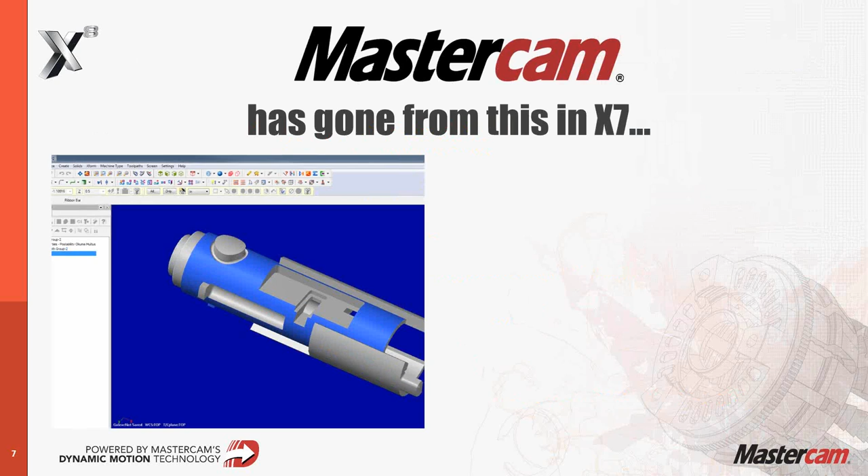If you've already installed X8, you might notice how the graphics have changed. We basically rewrote the graphics engine from the ground up, how the shading works, solid selection, and how the geometry is displayed on the screen, so it can really take advantage of newer processors, more RAM, and a good graphics card.

So what I'm going to cover here is just some of the general system improvements, from how the software looks to migrating from X7 to X8 and things like that.

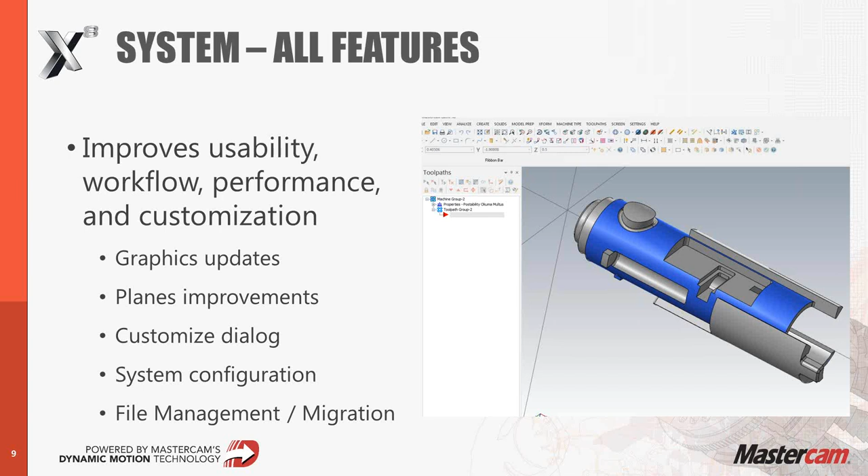This slide is more of what I've already been talking about, but we've worked on the graphics. The customize dialog box has changed, how you can set up the different toolbars and really make the system custom tailored to you, and also how you're migrating the software from 7 to 8. We got a lot of complaints before, and as a dealer we're always relaying your gripes to corporate on how we can make your lives easier, improving your experience moving from version to version and making that as easy as possible.

So some of the things from the general system: you might notice the View Manager is now called the Plane Manager, because this is handling all the different planes that you can select in the software. I also have a note here about hotfix 2.

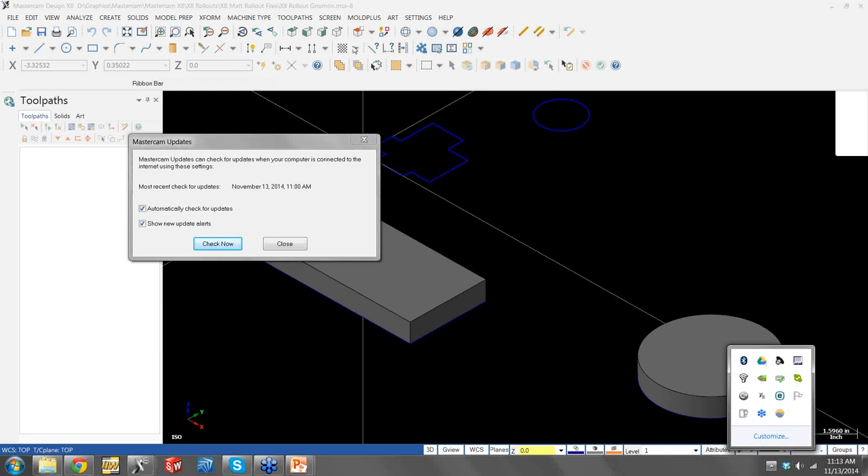If you already have X8 installed, if I hop over to one of my X8 programs here, under the Help menu there's going to be an Update Mastercam utility. If you have it set to automatically update, you should get a notification in your bottom right bar that there's a new Mastercam version available, but you can always go here and check manually.

Since we redid the planes and how they work in X8, there were a couple things they had to improve, so an update came out at the beginning of the week to address some of those items. With hotfix 2, when X8 first came out you weren't able to edit the default planes, but you can edit those now as you please.

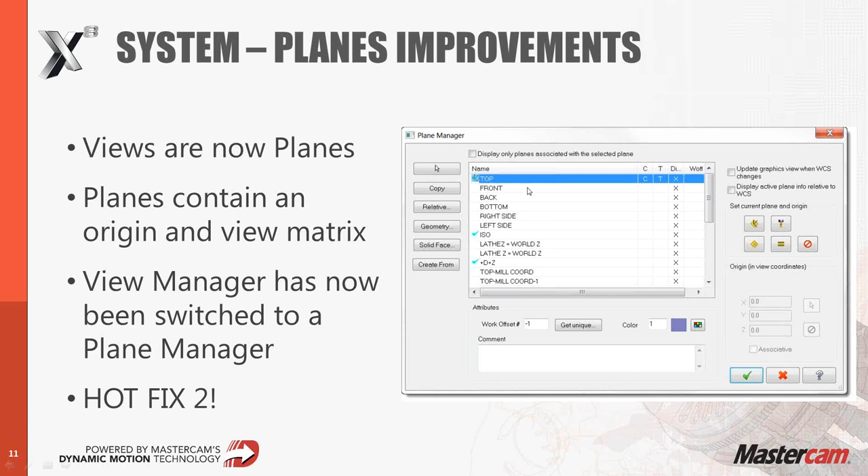As I was talking about the new workspace files, now that we're in this new format, it's going to be able to go from version to version, but it basically contains all those separate files that were in X7. Before you had a toolbar file, a key mapping file - all of those are now combined into the same interface. And what a lot of people don't know is you can also bring your key mapping file over once you get your new toolbars set up.

So some of the first things we do here: if you right-click anywhere in the open area and go to the Customize menu, you have your toolbar customization. The context menu is how you set up what your right-click menu looks like. Then if you go over to the key mapping file here, you can say import and bring over your key mapping from X7 or any other previous version, if you're still a big hotkeys user.

Another thing on this tab that a lot of people don't notice is how we set the large icons has now been moved to this menu. That's one of the first things I did when I installed X8 - I could not see those new icons at all, so I just switched it to large icons.

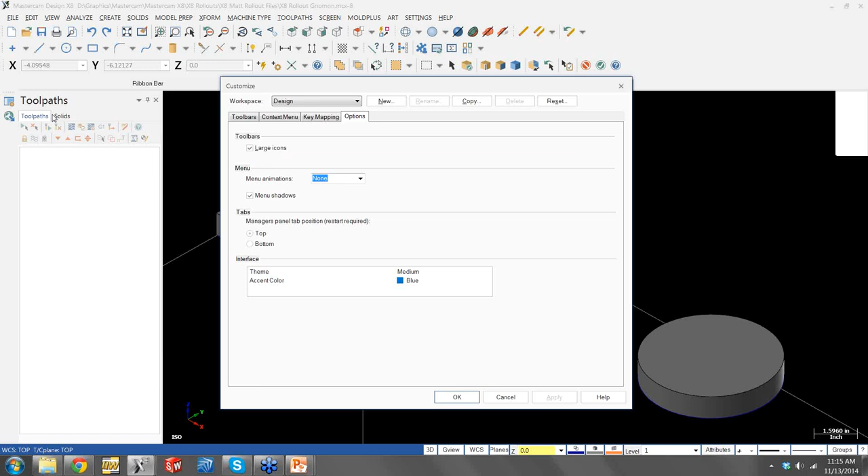Another thing a lot of people notice is on the left-hand side I have my toolpaths and solids up at the top. When you first install X8, these menus are going to appear at the bottom. I'm a creature of habit, I want it to be how it was for me in X7. So you just switch this from bottom to top, restart Mastercam, and now all these menus appear where you're used to seeing them in your operations manager.

Do we have any questions yet, Dave, or anything?

So a little bit about file migration. There's now two different modes for moving from older versions to X8. What I always say is if you're going right from 7 to 8 and you're using the normal file locations, you just want to use the basic migration. It has everything pre-set up - it's just a couple clicks and you can get everything transferred over right from 7 to 8.

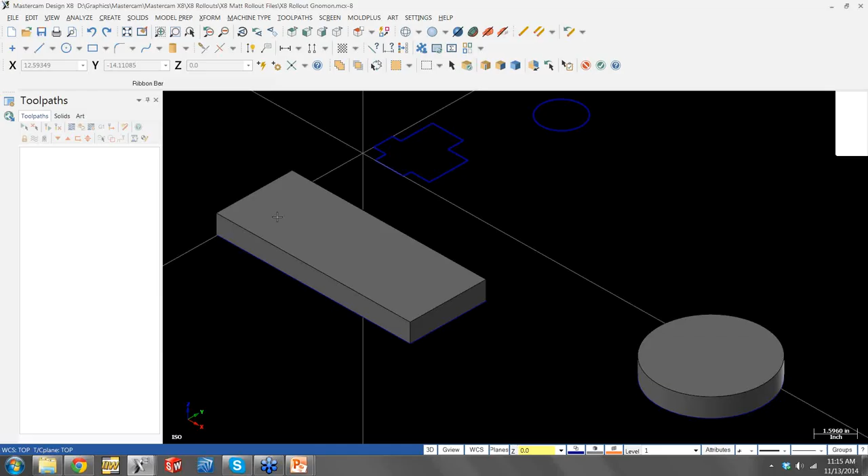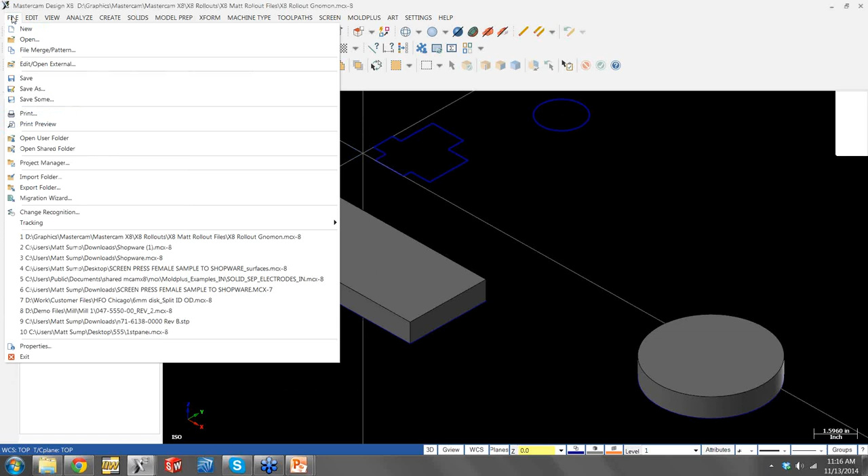If you're going from an older version, you're going to want to use the advanced utility of the migration. If you go to the migration wizard, you'll have the basic, which just strictly migrates your shared and MCAMX folders into the new X8 locations. If you do have custom locations, you can define them here, but if you're using custom ones, I always say use the advanced utility because you can really get into the nitty-gritty of how files are being transferred over and what's being moved over.

You have your options of different file types and what version you're coming from. So if you're coming from 6 or older, you can just say I want to move files from that version, but you also have the ability to move multiple versions worth of files over in one setup. This Finish tab here basically gives you a summary of everything you have set up. Before you click go, you want to make sure you have all your ducks in a row and haven't missed a set of files or something like that.

Some of the improvements we've made on the design side of the software, and also a lot in the solid modeling tools, is we've updated how the GNOMON works in Mastercam. If you guys were like me, the X7 GNOMON had the XYZ listed on here, and you didn't really know where to click to move different features around or edit how the geometry was being displayed.

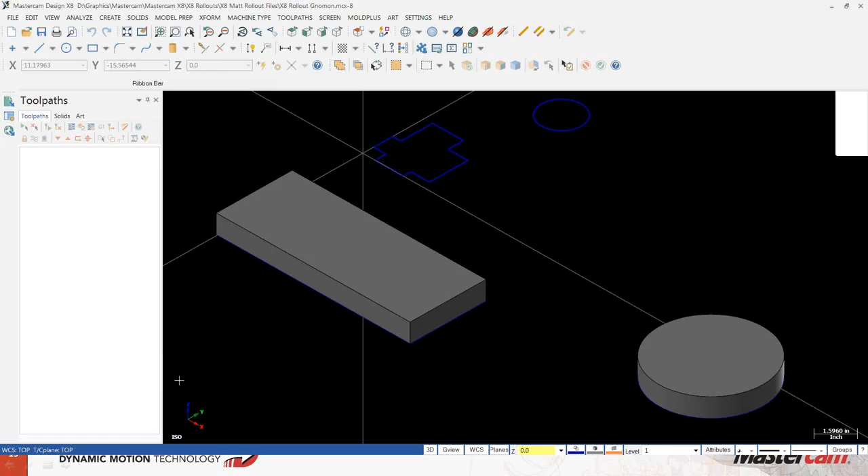So if I go back to my Mastercam here, I got this chain, and I want to move it or rotate it - I just go to Xform Dynamic, and I pick what I want to move, say OK. Now this is the new GNOMON here, so I can really place this wherever I want because it's relative to the geometry I have selected. Let's say I just plop it right in the middle here.

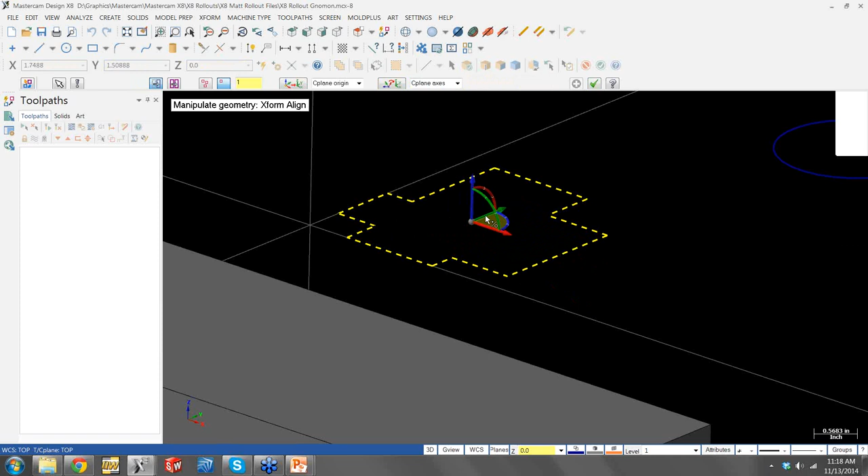Now all these sliders are dynamic based off of the axes that you're trying to move, and it's always going to give you a preview of the area you're selecting. So if I'm clicking on this part, it's going to rotate about. If I'm clicking down here, it's just going to move it in the X axis.

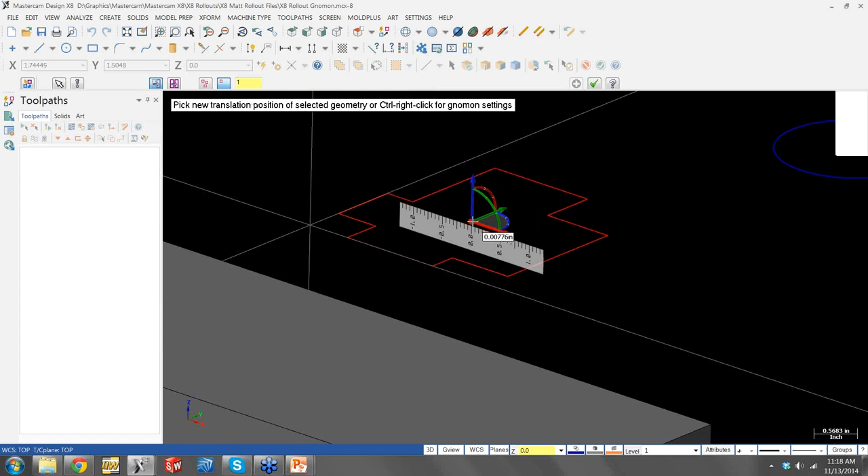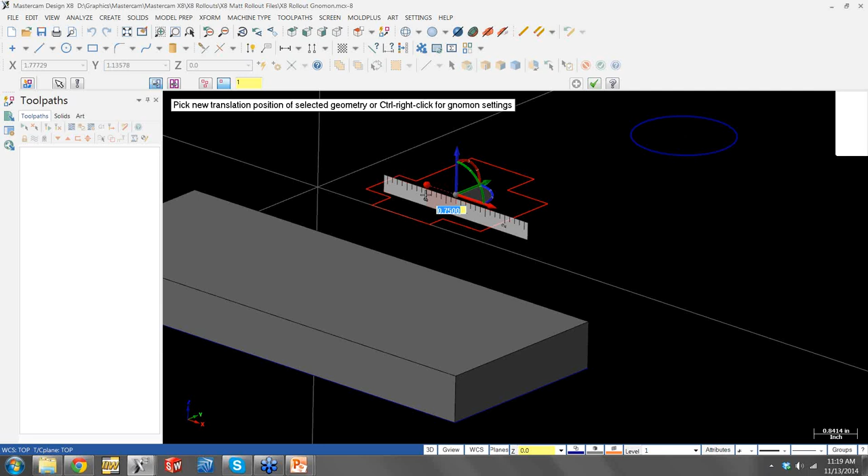So if I want to move it a half inch, I can just say 0.5, and if I hit enter once, that's going to give me a preview of what I was typing in. So let's say I didn't want 0.5, I wanted 0.75. I can hit enter again, and then it doesn't accept my selection until I hit enter a second time.

And now that geometry's moved. There's also, it's kind of hard to see here, but if I go back into the dynamic Xform before I go into a specific function like moving the geometry, you have the option to switch between geometry editing and actually editing your axes.

So if I want to rotate this around, it's now in axes mode. So it's not moving the geometry, I'm just moving where my plane is. So it makes it an easy way to set your planes from before.

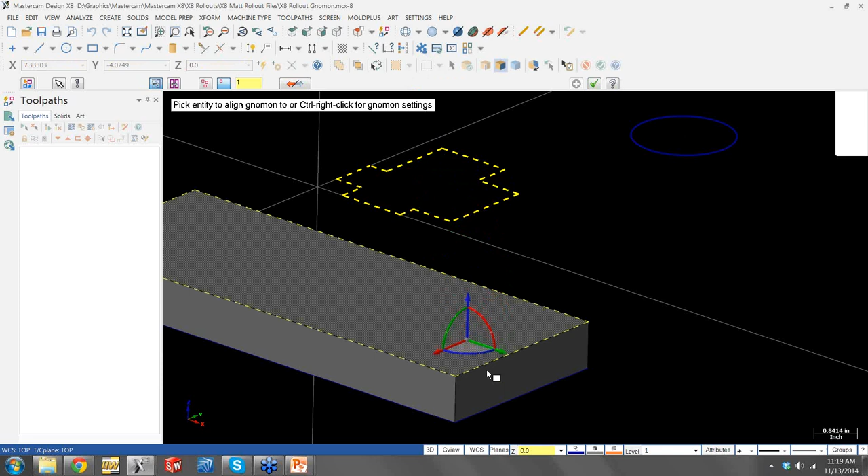So if I want to move this around, I can pick this and it'll snap to different faces of what my Z0 is. See how that blue arrow sticks up based on whatever face I'm on? It just makes it an easy way to set planes on different sides of the part, and then you can select the center ball here to then assign your 0 point.

And then I can update here, do I want that to be my C plane or just my T plane, and so forth.

So any of you guys with the solid modeling option may have noticed if you're already using X8, the menus look quite different. This is going to be kind of the direction we're going for all the menus in the software. Everything's going to be contained in a basic and advanced setup. They did a lot of usability testing.

Mastercam, as part of this push to the new interface and menus, hired what they call a user interface engineer, and they did a lot of testing over at corporate with the beta testers. If any of you guys are on the beta program, they had the ability to log how many mouse clicks you're using in a session, what the total distance your mouse was moving in a session, and features that guys weren't typically using. They would kind of get them out of the way and move them to that advanced tab, so you're not getting a menu that's cluttered with a lot of things you don't typically click on.

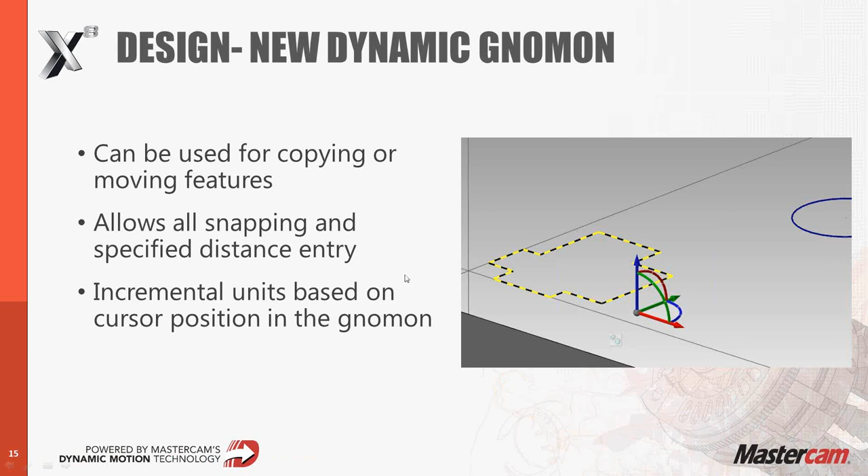So we've added a lot of things in the solids as far as actually editing them and creating the solids. You can create multiple solids within the same operation. There's now solid edge awareness anywhere in the solid. So before you'd have to create curves on all edges in order for it to know what the midpoint of this line in the solid was.

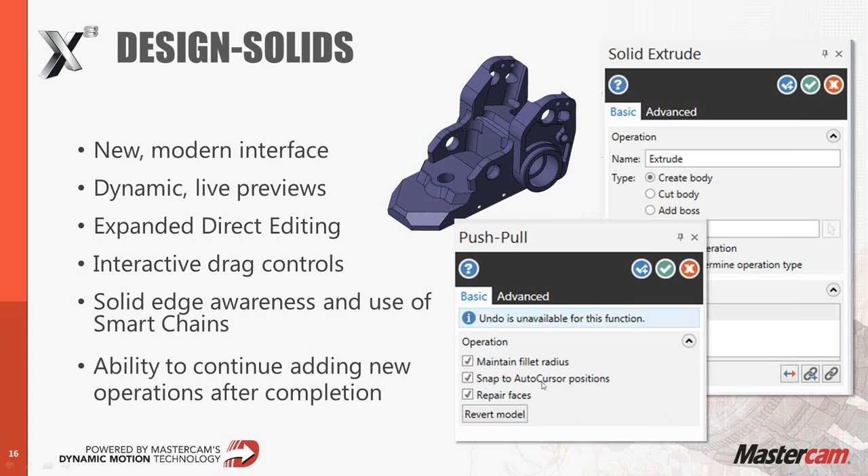Whereas now it just knows based on that edge of the solid what those features are that a user might want to click on. And you'll see in the option here, it's that snap to AutoCursor position, as far as intersections and midpoints and things like that are concerned.

So as far as actually creating the solids, you have the same options as before. They just simplified, as I was talking about a few minutes ago, allowing you to create multiple solids at the same time. So before, if I wanted to extrude both of these solids, you'd have to go out, create a new solid, go back in, perform the same function again. Whereas now if you just go to solid extrude, I just pick the chains I want to extrude, and I can pick as many as I want, and then move them up by a specified distance.

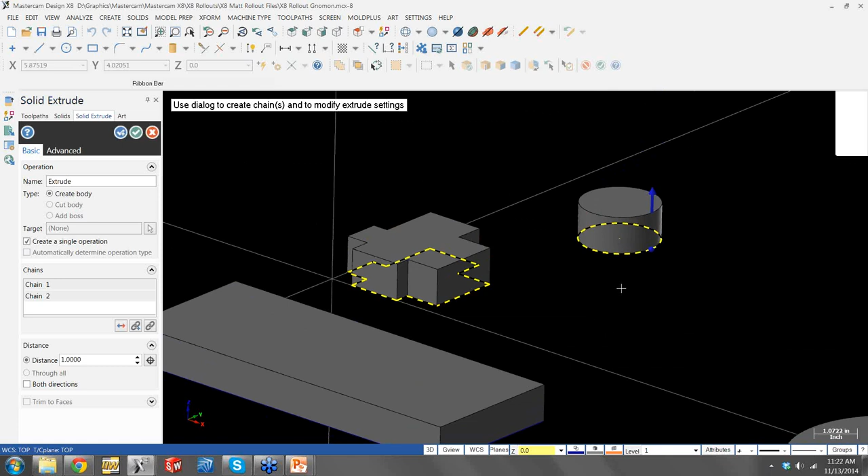So if I get these centered on the screen, just like the dynamic gnomon, all of these other features are dynamic now as well. So you have the slider bar to set it, and you can always type in a value and go from there.

So one of the cool features I noticed they added in here is called split solid face. You can basically, without having to draw additional geometry or go off a print or something like that, edit the solid dynamically without having to set up your different planes. It just knows based on the face you want to select and how you want to edit and split the solid up.

So the one I have in here, let me see, I got too many files open. Is this one it?

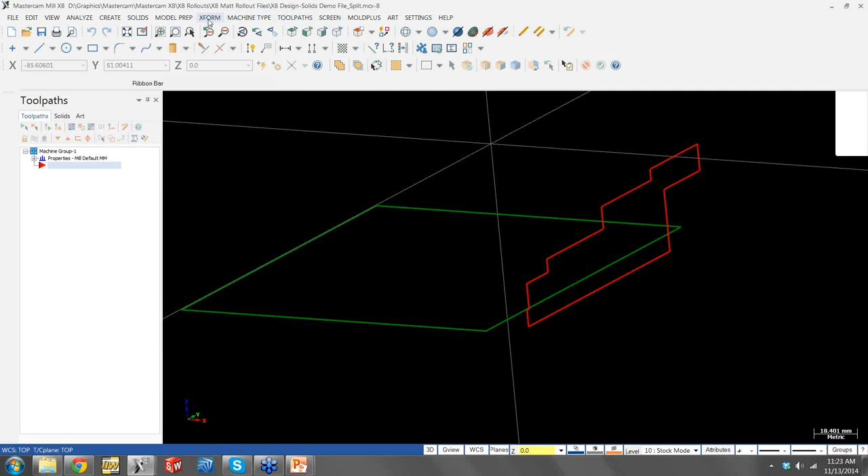So let's say I have a print from a customer and I need to create a solid block, and I can use this geometry on the right in order to split it. So I can go into my solids commands here and say extrude, just like before. We can enter this up, pick it. Let's say I want to just make it 50 - this is in metric, so it's 50 millimeters.

Now that I have my solid created, if I want to split this face or create anything like that, I can go to my model prep tool here and say split solid face, and I'm still in my top plane. So if I go to my top view here, it's still set to the top. I don't have to assign this plane on the right.

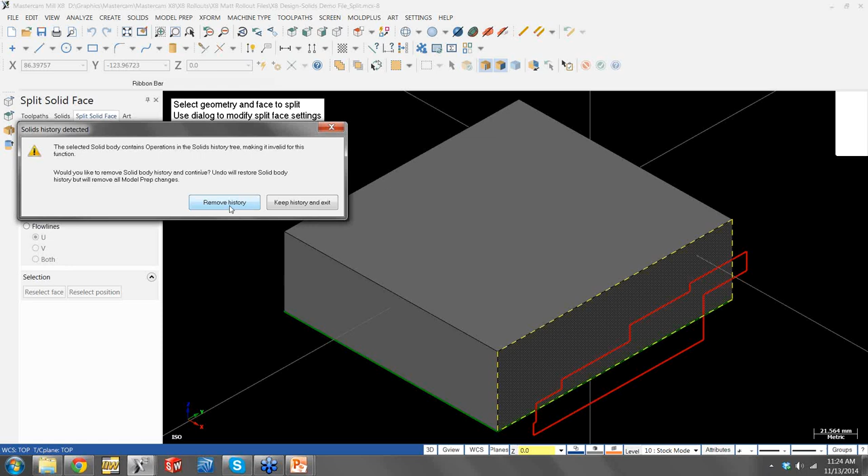But what I can do is just say, okay, which is the face I want to split? Now anytime I'm doing any of these direct solid modeling commands, it doesn't necessarily care what the history is, so it's going to pop up and ask me, do you want to remove the solid history, because I'm directly editing off the solid model. Then I just pick the chain where I want to use to split the face, and you can see it gives you a preview here of how it's going to split that solid.

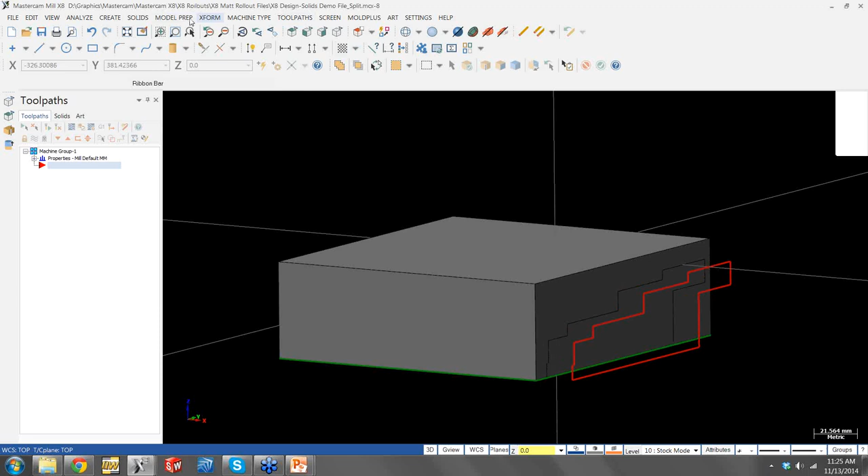So I can say okay, and now these solid bodies are split, and that was the geometry based off of my print. I can just use the model prep commands and say I want to get rid of this face, and it basically splits that solid to how it was based off of the print. Before, you'd have to do an extrude cut, go into another command, and you can really do anything you want based off of that.

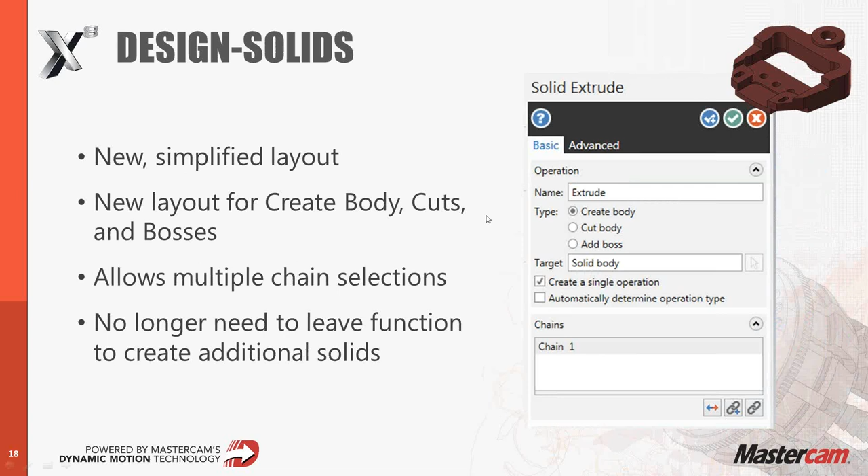So part of what I was talking about before with the solid edge awareness, it just allows you to select on the model without having to create wireframe, and you can make positioning a lot easier.

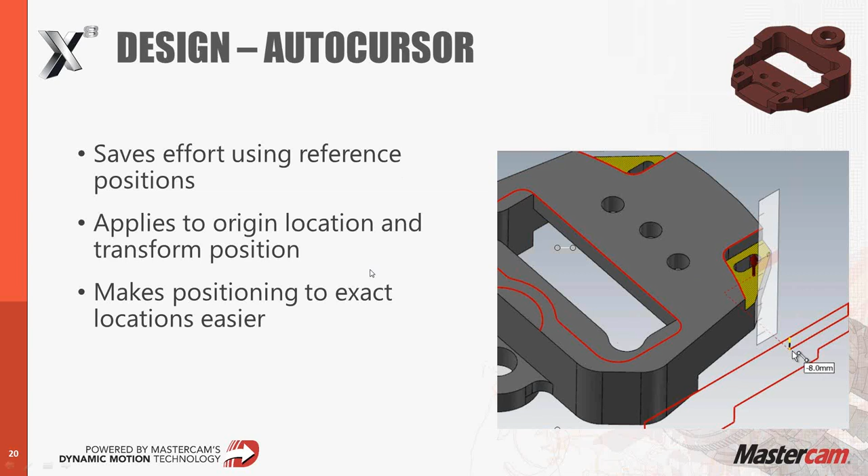So if I go back to that part I was just in, let's say I want to move this face back to a certain position - now I want to turn on my snap to auto cursor position. If I want to drag this back and I don't know what that specific distance is, and I just want to pick it up off the print, I can just select here off of that geometry saying, okay, it moved it back 42 millimeters or whatever it was.

You can also now use that dynamic gnomon I was talking about as far as moving geometry or using those solid features as a way to edit really anything on the solid. So basically this allows you to use a reference pointer off the existing model in order to edit the features however you please, without needing to know a specific angle or having to read off the print. You can just know, if I want to rotate this hole 15 degrees, I can reference it off that point, use the dynamic gnomon, and just rotate that feature 15 degrees without having to really get into it and edit the feature directly.

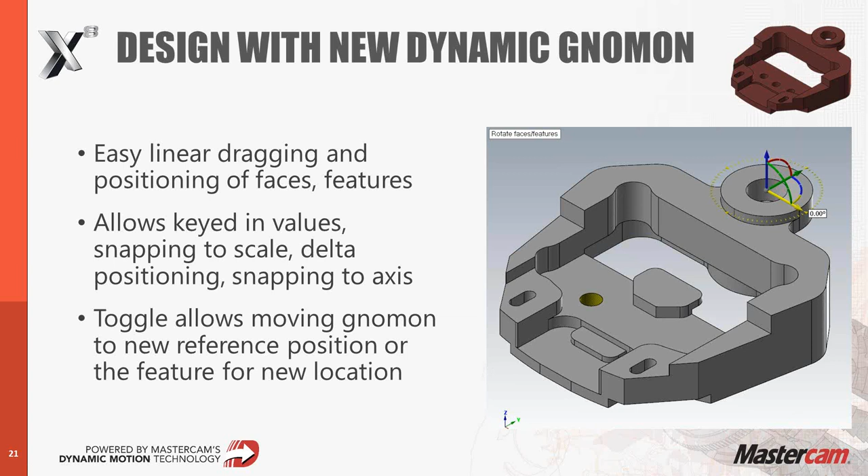So a little bit on that solid edge awareness, I'll show you guys some here in that file. It kind of takes care of a lot of different functions that you would have to use before as far as editing the solid is concerned.

I'm just going to do this real quick here because I know you guys want to see the toolpath part.

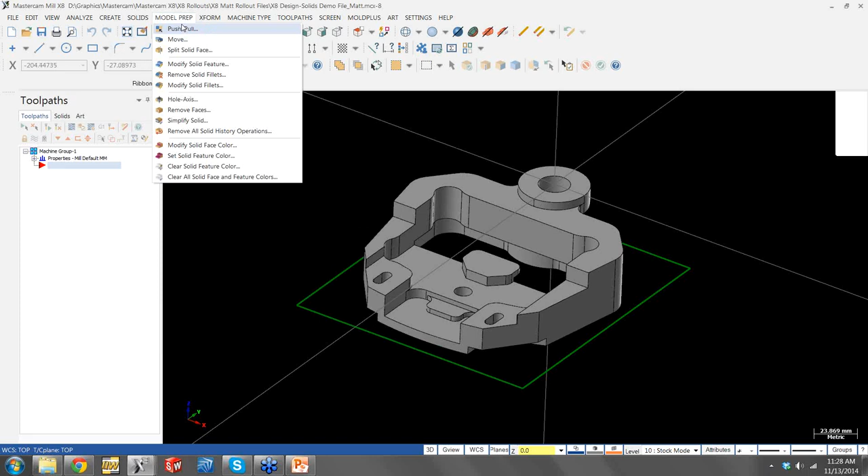So say I just have a basic solid here and I want to move this face up to that other face - before you'd have to create a wireframe or know what that extrusion distance would be. So you can just go to the push-pull here, say I want to snap to auto cursor positions, pick that face, and now I can just snap it to that edge, and it knows without having to merge it. It doesn't create separate bodies - it knows that since it's on the same plane as that part of the solid, it's now the same solid face.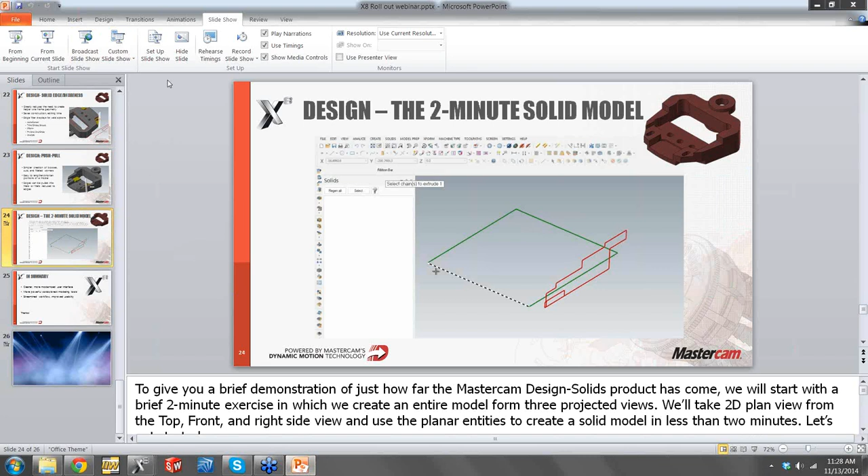Very powerful tools. So while Dave's getting set up here, I am just going to let this video play.

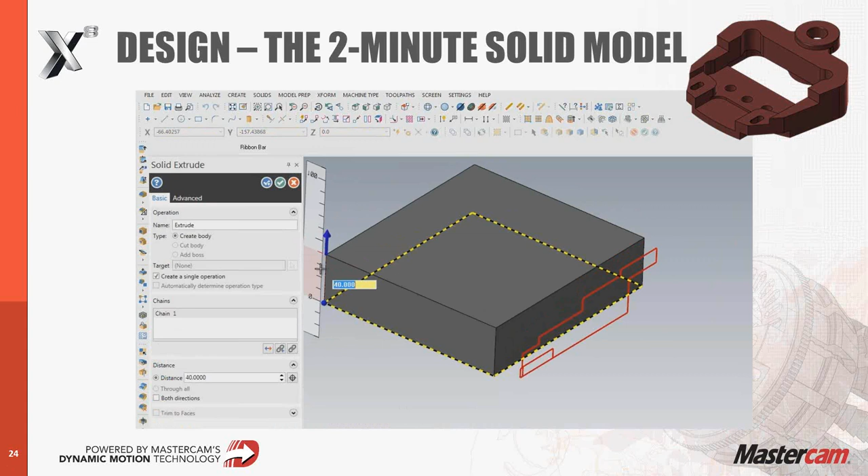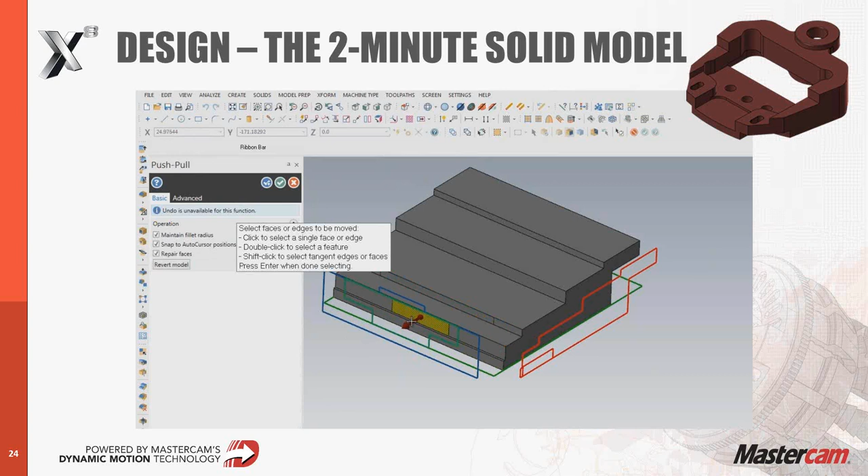This is actually creating that solid. You saw some of the features I was working off of, but it's what Mastercam calls a 2-minute solid model. I don't know how long this would take to make in previous versions, but it's just a combination of all those different features I talked about: splitting solid faces, using the direct solid modeling tools that are now in there to really create solids quickly and easily. These are really handy tools as well, if you're getting models from customers or from engineering where you need to make quick changes on the fly to the model in order to really get the part ready for machining, which is what our designing has always been about.

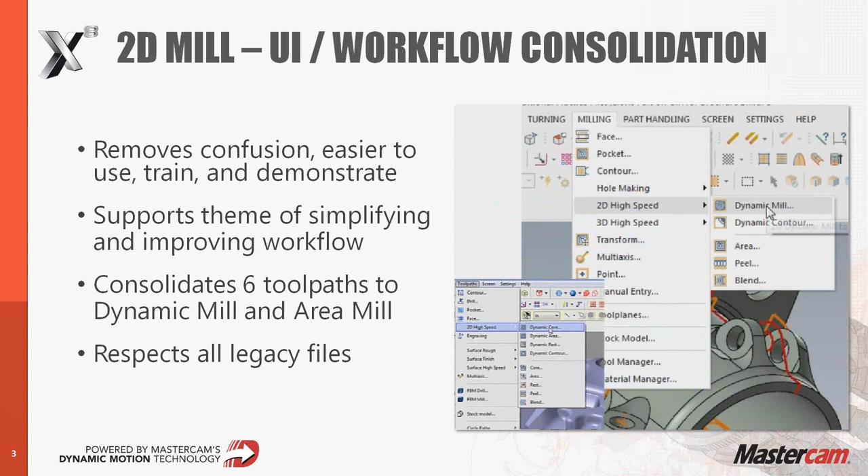Now I know everybody's going to probably ask this question: what happens to all my old files? All your old files are updatable, so once you bring them into X8, it's going to automatically convert those toolpaths to the new style, with just dynamic mill or just area mill. So you're not going to lose any of your options and you won't have to recreate anything.

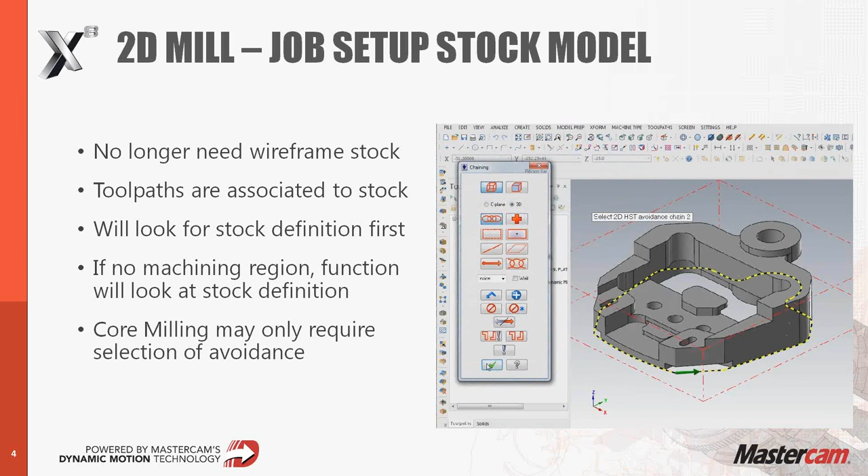So with combining everything, some extra features that have been added are the new style chaining. I know you're probably thinking, what could you guys do different? It was working great to begin with. Well, inside here now, you've been used to just machining regions and avoidance regions. Now we've added 2 extra categories: air regions and containment boundaries. We've also enhanced the machining regions to now utilize the stock setup page. So if you're setting up your stock ahead of time, when doing a dynamic core, instead of having to draw a box or a cylinder to represent your stock, it can now pull the outer boundary of your stock setup page and utilize that as the machining region, saving a couple extra clicks and some extra geometry from being created.

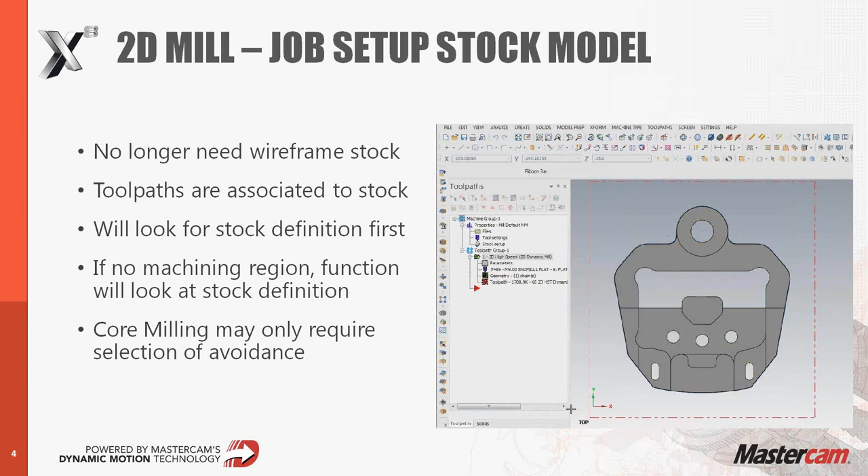The new chaining - here's the new menu, if you guys can keep seeing my screen here. It's all consolidated, so when you go into dynamic area or dynamic mill, it comes up with this, and you can just easily choose: I want to machine from the inside or from the outside. That toggles it between doing area or core. Once you get further inside the toolpaths, that's where you can even turn on the rest roughing in both area and core mode. So once again, it's saving a couple extra clicks and having to change over to different toolpaths.

Like I said, we also added 2 extra style chains that you can use to customize this toolpath even more. The first one is the containment regions - just like in the 3D world, it's going to contain the toolpath within that zone only. It's going to do exactly what it says: it's going to contain the tool. And then you get air regions, which are going to utilize whatever chain you select.

It's going to basically treat it as an empty void that it doesn't need to machine. It could go and plunge in there and cross through, but it doesn't need to go and machine that.

So I'm going to toggle over to a part over here. A little bit of a complex part, lot of different features going on this one. I'm going to show you a couple different toolpaths. The first one, just like what you guys are used to, is a dynamic core, starting from the outside, working its way in, machining out all the different zones.

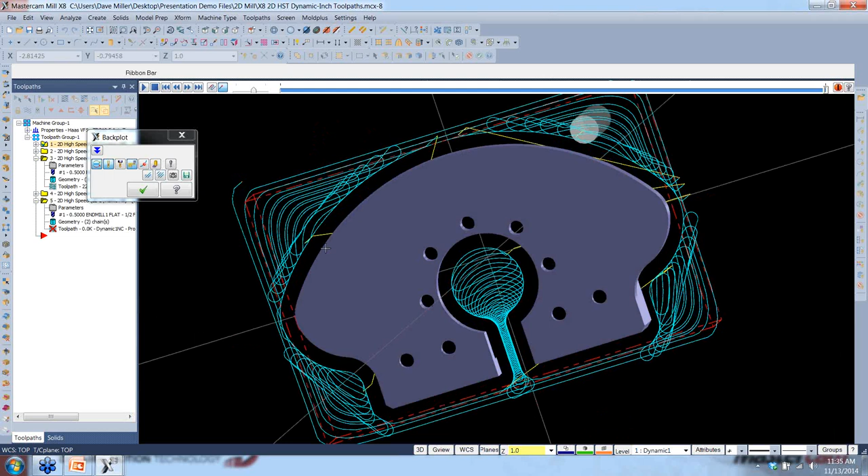Now, all we actually selected on this was an avoidance region being the outer profile of my part. We didn't select any machining region or anything. It automatically takes the max extents for my stock, which makes it a little bit quicker.

Dynamic area mill, just doing a cavity, so we selected the machining region being this face on the floor, and said start from the inside, pocket that out. Quick and easy.

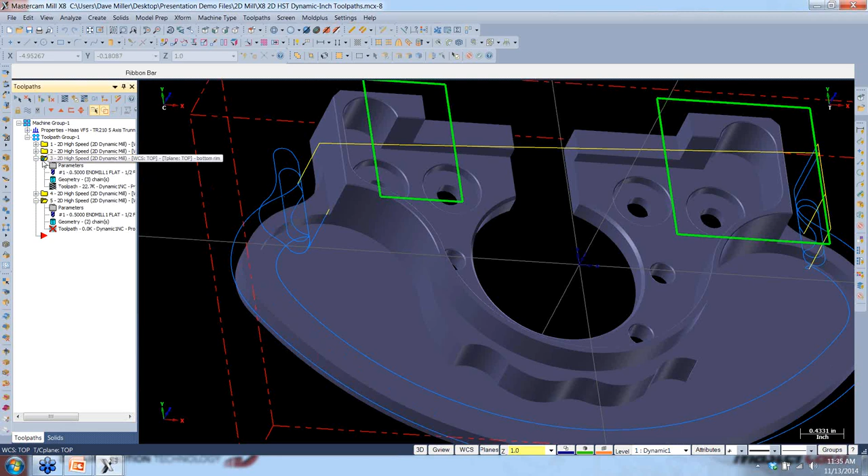For extra customization, in this example what we're doing is selecting the machining region being this face, and then telling it to avoid these boxes so it doesn't wrap around the edge or onto anywhere on the inside here. That's going to clean up just in case there was an extra lip left from roughing. So you can customize it pretty easily.

You can do the same thing with this face. We drew a circular type of feature that would represent this top lip and said, machine this lip, this top face. It's getting machined from the outside, working its way in, just cleaning up what material was left.

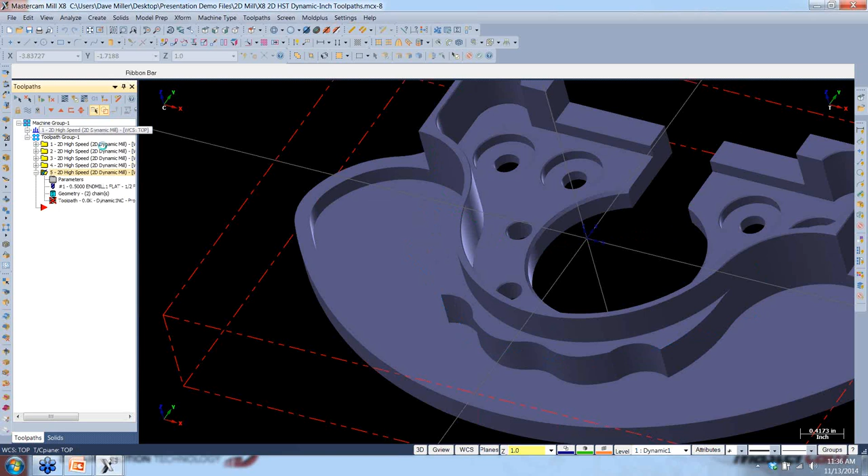And this last one, where we actually said, okay, this face is my machining region, but then I can select this slot that's already been cut out from my dynamic core mill and say that is an air region. Now, in prior versions, you could select that as an avoidance region, and it wouldn't cut in there.

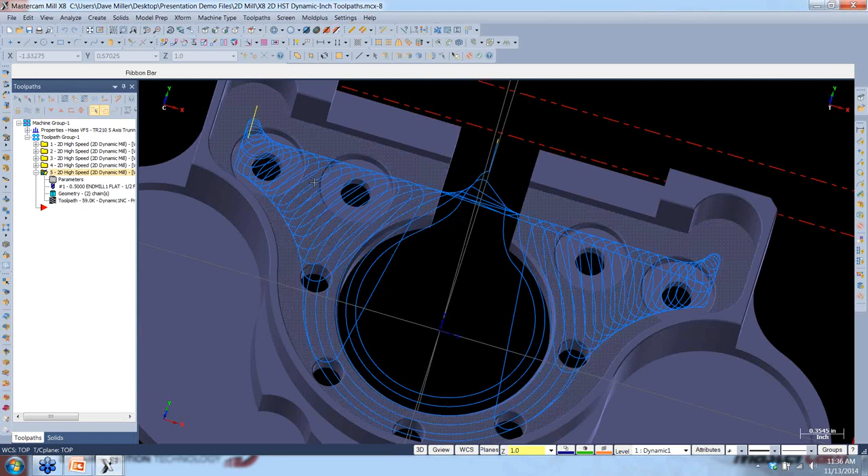But it also wouldn't start inside of here, so it would have to helix down into an area where there was material, which is a little harder on the tool and wastes extra time, versus now it's going to plunge inside that air region and do a nice smooth entry onto the part.

It can be quicker, easier, and pretty simple to chain. It's just two chains, once again, machining region being the face, and an air region being this loop. Quick and easy, and it's going to save quite a bit of machining time as well.

Another thing that we've added to the 2D high-speed toolpaths is our first pass offset. This is in all of your dynamic mill toolpaths. What this can really be utilized for is, let's just say my stock is irregular.

Maybe I'm setting this up as a 2x2 inch square for stock, but maybe I had Ryan go saw cut this, and he wasn't that accurate with it, so I'm not sure exactly what that extra material is.

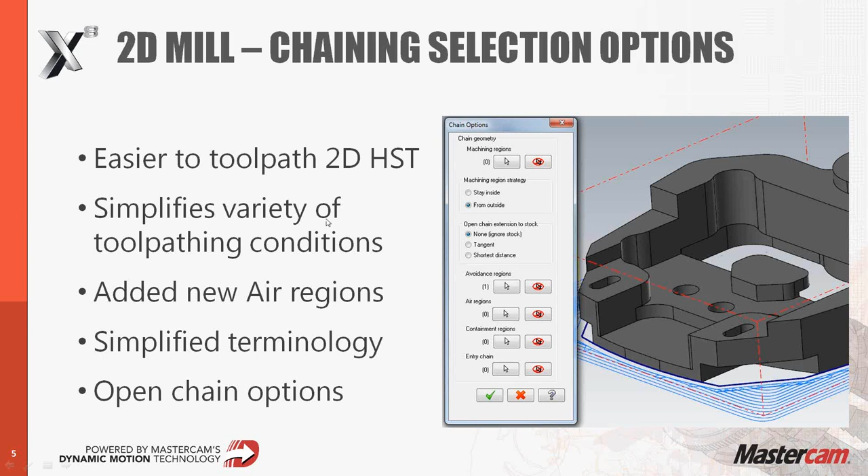So what I can do is offset the first pass maybe 1/8 of an inch or so, and I can even reduce the feed rate on that first pass. That allows it to slowly go through that first loop, and once it gets through that first pass, it's going to speed up the feed rate to the proper feed rate to cut when it's a known size material. Just trying to be a little bit safer here, and accommodate for irregularities on the stock size and shape.

It's a nice handy feature to utilize in there. Just skip through that video there, and do a video of this being machined.

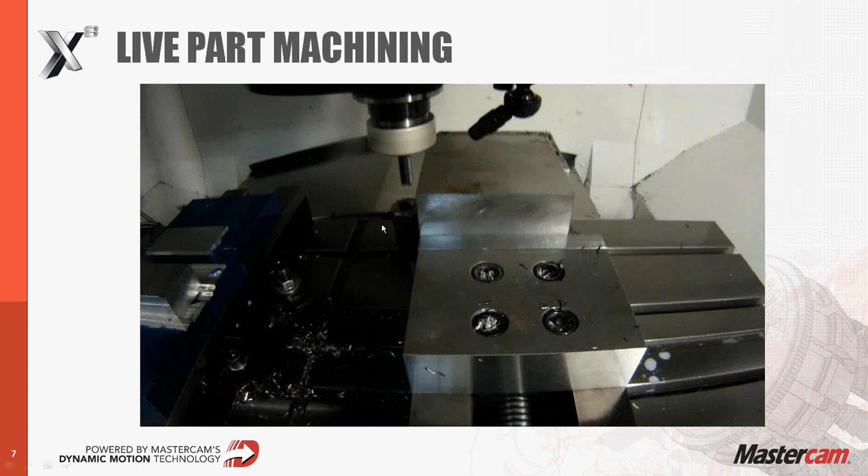So if I actually let that run through, this was, I believe, run at the local Okuma dealer over here. This was a 4130 steel that we cut. You can see it working from the outside, working its way inward, shaving away that material, with a nice even load on that tool at all times.

Not sure if you guys can actually hear it, but one of the nice things about these toolpaths is, for anybody that's been out on the shop floor, you know what a good cut sounds like. When you hear these things go, you'll know right away this is a good cut versus when you take a tool and it's just screaming and pinching in the corners, hearing that machine chirp. I know it's not the greatest to play over the internet, so I'll get past this video.

Other things we've really done is a lot of testing for good feed rates and spindle speeds. A lot depends on the quality of your tooling and what material you're running. This was for one of our tests on 1048 steel. If you're doing traditional style, more of a 50% step over, you're going to be at a slower feed rate, slower spindle speed, kind of more conventional out of the machinist handbook. When you get into utilizing radial chip thinning, you can really back down that step over and speed up your RPM and feed per tooth. The further you back down that step over, the faster we can get the feed and speed going, and really just drop that cycle time tremendously.

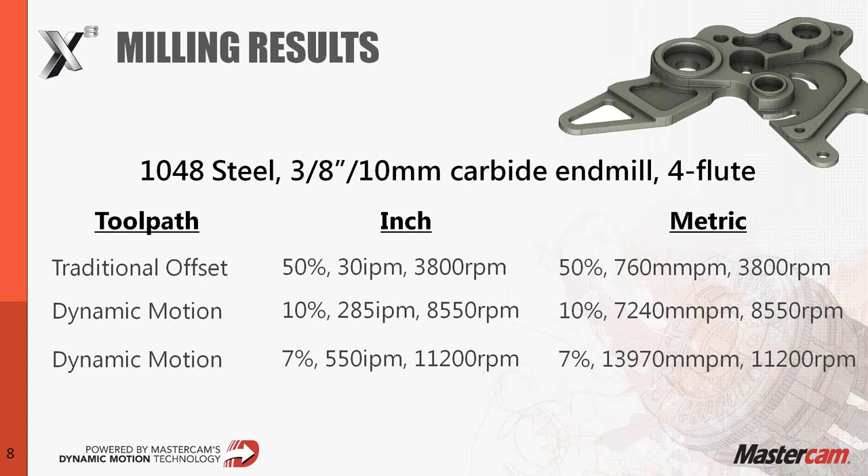All right Matt, do we have any questions so far? None that I see, everyone's pretty quiet.

Okay, now I'm going to keep going on to our 3D side. So for the 3D side, what you guys saw for some of the dynamic motion, that's all been transferred into there as well.

But even more so is cycle time, or regeneration time. It's never fast enough, everybody can always use the software to go faster. So as you guys have noticed in X6 and X7, there's been speed improvements on regeneration times, utilizing more and more of the multi-core processing. Management has gone and bought you guys all these really nice fancy computers, so we might as well utilize it fully. So now in X8, we've added multi-core processing to your Z step-down based toolpaths, that'd be your waterlines, your more conventional core rough, area rough toolpaths, as well as your horizontal finishing toolpaths. So it's going to make life a lot easier and a lot quicker.

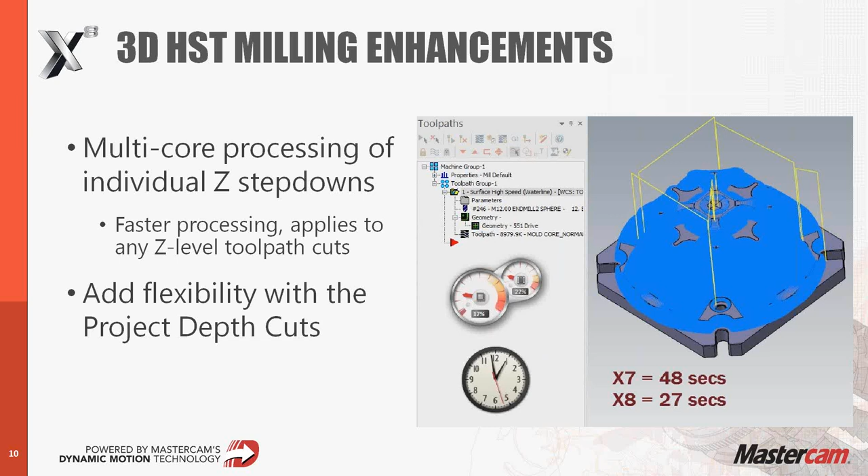Other enhancements we've gotten into with the 3D surfacing toolpaths kind of dives into a little bit with the multi-axis toolpaths as well. I'm not sure how many of you guys actually have 5-axis machines, but one of the big things everybody's always looking for when they have a 5-axis machine is just to tilt away when it needs to avoid a crash. Stay vertical, but that allows you to shorten that tool length up, make it short and stubby, nice and rigid, but then apply a holder and tilt away only when it needs to. It might not even need full 5-axis, except for the fact that I just want to shorten that tool length up.

So what we did is inside of your surface finishing toolpaths, your surface high-speed finishing toolpaths, is we added more to our collision checking. So inside of all your toolpaths, when you go to the holder page, we can go and associate a holder and associate this stick-out, the tool projection.

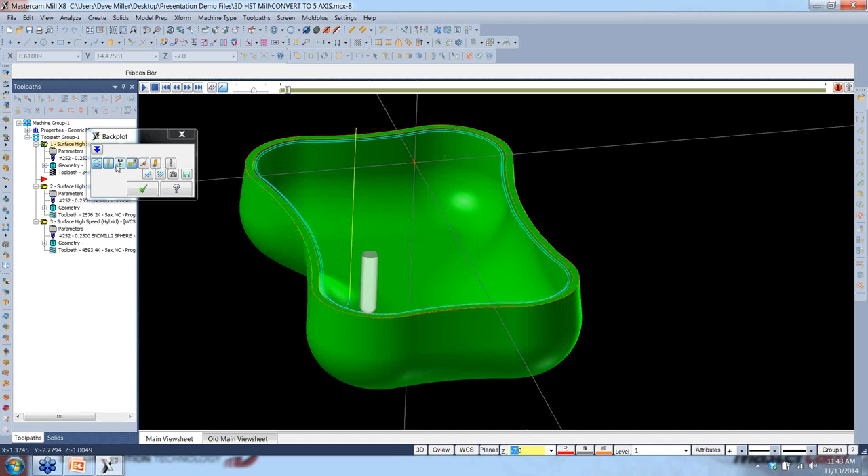So if I take that hybrid toolpath and I backplot this, everything looks good so far from the top, and as I get down, you'll start noticing that my holder is going to be inside my part. So I've got some crashes going on here.

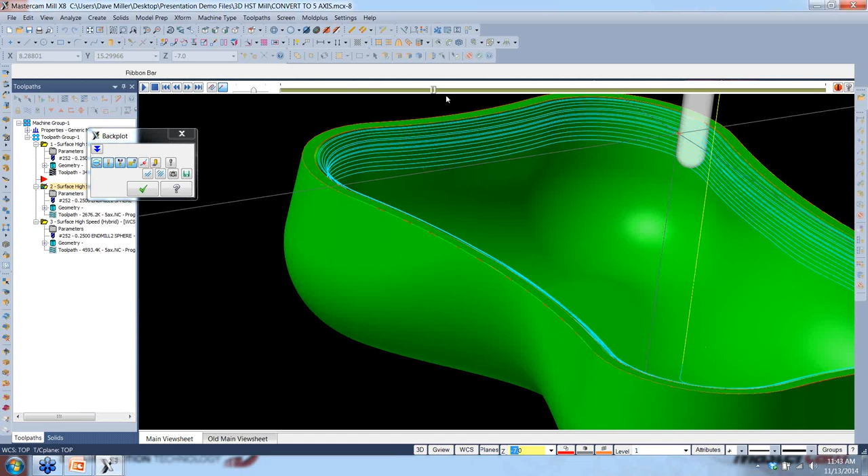Now I know the typical way if you don't have multi-axis is you just take that tool and stick it out farther and kind of slow down the feeds and deal with it. The other thing you can also do, if you don't have a 5-axis, is just trim away the gouge points. So if I take that by just taking out the gouge points, it runs great, but then it's going to skip a section. You can see this whole section right in here, that tool did not go and finish that area off. Now I could always come in with another tool, another toolpath just to clean up that area, but at least now I know I'm not gouging.

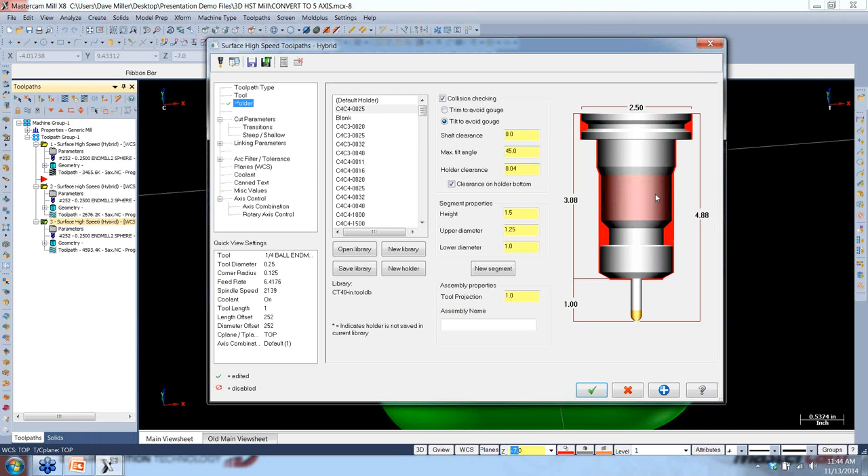What we've added in X8 is now the ability to do a tilt to avoid a gouge. I can set the max tilt away angle in my clearances just like before, but now as I process this toolpath, I'm going to turn off my vector so it's a little cleaner for you guys to see. As it gets further down, it's going to tilt away from that wall to avoid hitting that holder in there.

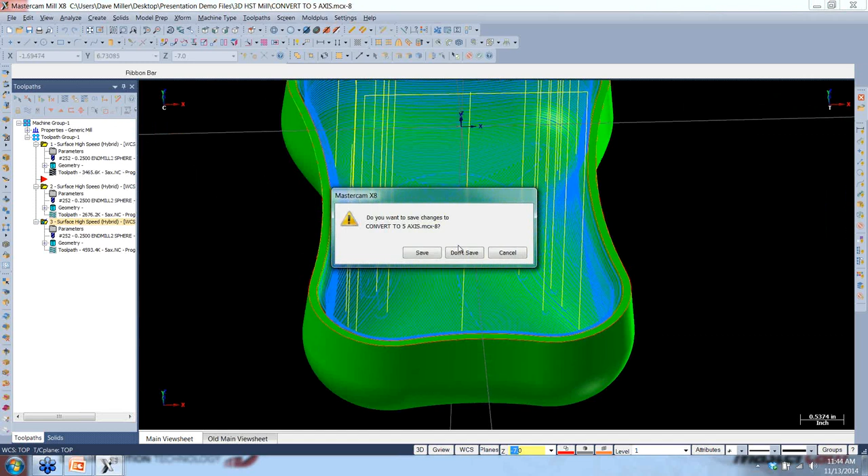It's now a nice clean toolpath with no gouges, and it's going to go all the way through. You can even notice that as it gets closer to center, where it's not going to gouge, it goes back to a vertical orientation because it doesn't need to tilt away anymore. It can be nice and handy, and that should handle most of the parts that are out there for people.

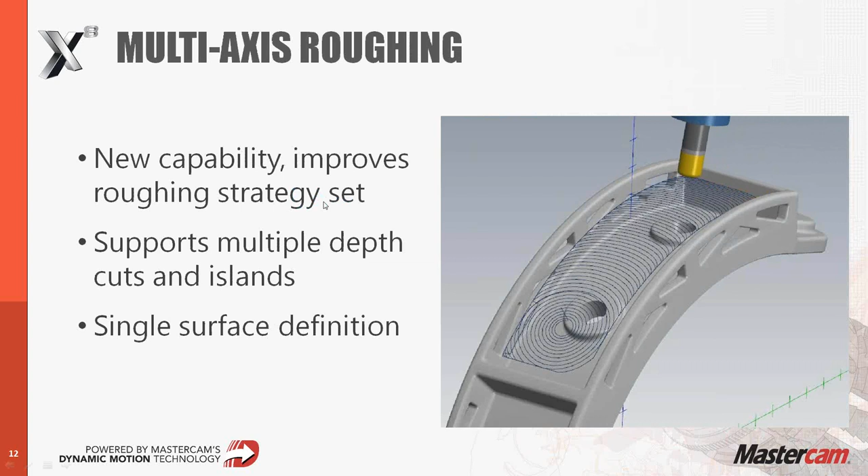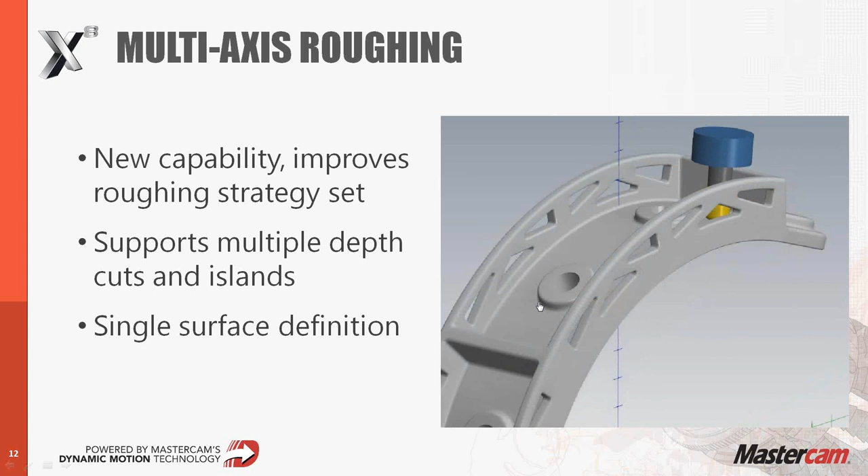More things we've added to the multi-axis side would be more to the roughing side. We're constantly talking about this dynamic motion and how it can save a lot of time and be so much easier and more efficient on your machine. Well, now we've come out with that on the multi-axis side.

I'm just going to flop over here and show you on this part. Right now, we're just going to rough out this cavity. It's a rectangular slot, but it's curved around, and you've got these bosses in there as well. So we can actually do a multi-axis roughing where it does a dynamic toolpath to rough it out.

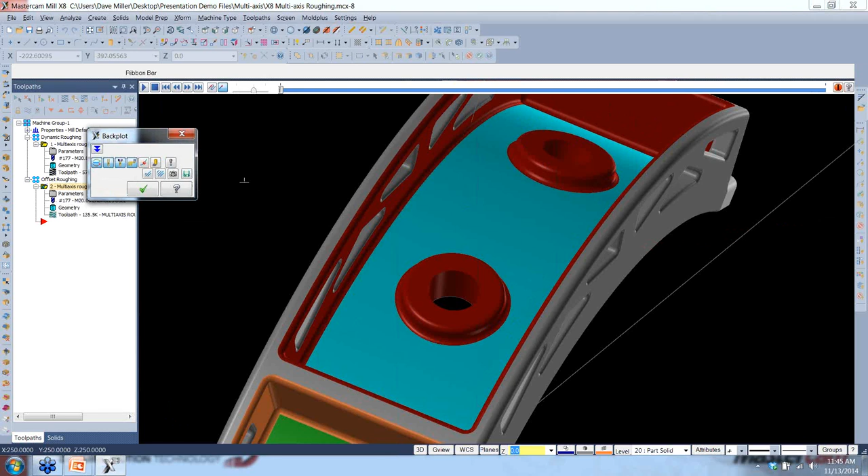It's going to do even the micro lift and pick out the corners. You can do zigzag or one way, just like in the 2D and 3D side, and rough that out nice and efficiently. For guys that might have a little bit older 5-axis machines, you could do the same thing, but in more of a conventional style 5-axis roughing - doing a pocketing, more of a conventional offset pocketing type of toolpath, working its way from the inside all the way out. Quick and easy, get that job done.

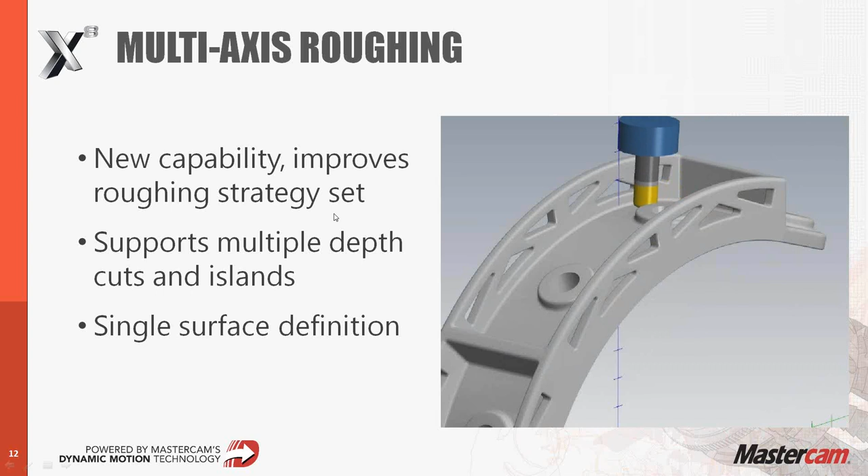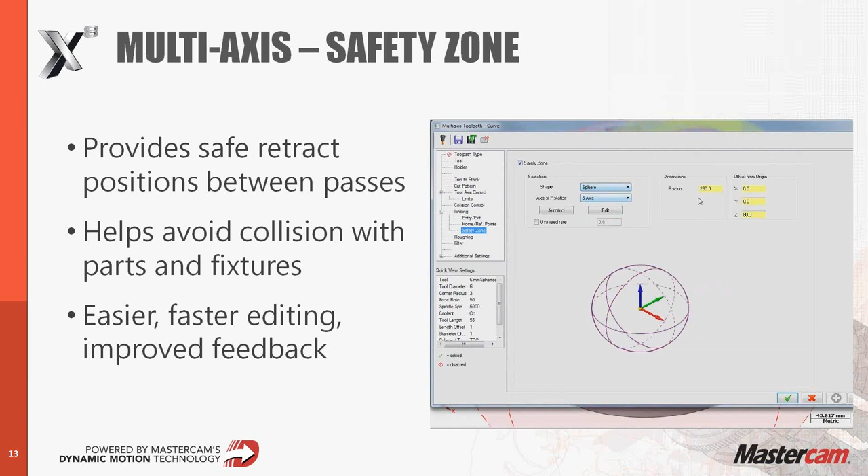We've also added a lot more things to be safe when calculating these toolpaths. Especially in the 5-axis world, the last thing you want to do is smack a tool into the part or any of that type of stuff when transitioning from one side to another. So we've added our safety zone.

So if I go and open up another session of Mastercam - thought I had this one open as well, that was our safety zone. Let me just open that file up.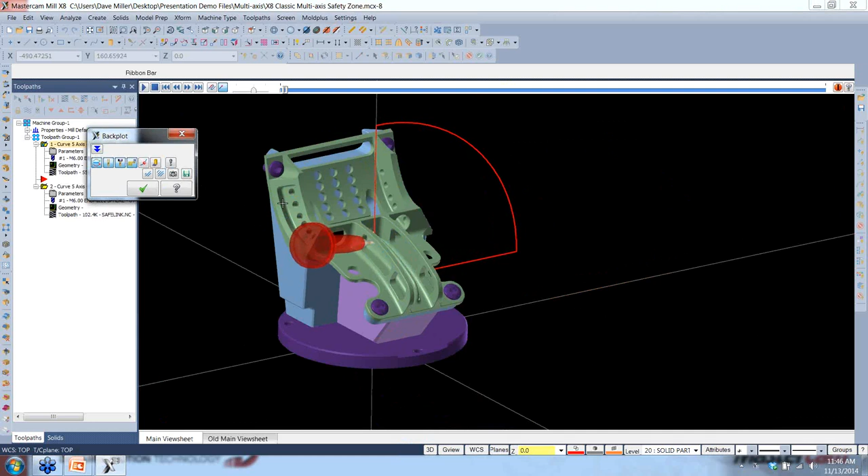So what you guys are used to seeing is toolpath one side and then backplot just jumps to the other side, and you're going to say, I hope that that's clear. It might not be, might be. You see something like this where maybe I would need to just increase my retract all the way back a significant amount, and hopefully the machine kinematics would traverse from there.

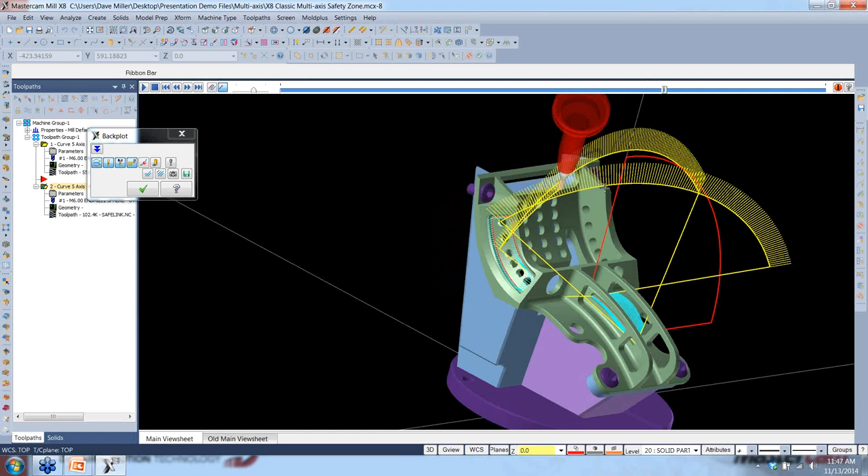Now what we've done is we can go and define out our safety zone, subcategory linking safety zone. So I'm telling it a sphere around my part, transition in full 5-axis mode, and you get something that's going to look like this. I can do my cut, and then it's going to retract out to the outer perimeter of that sphere, and then transition around in that safety zone, and then go to my next cut. I can bounce side to side all day long, and I know that I will be safe and won't cause a crash. I'm sure your boss will be very happy to hear that as well.

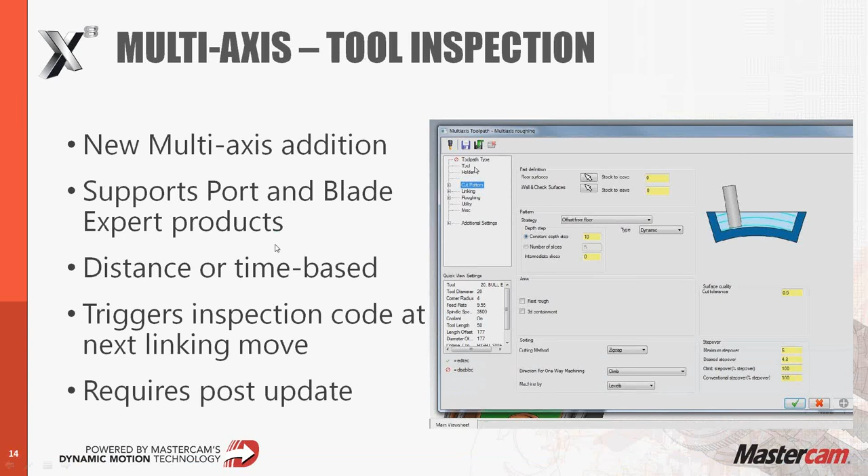Another thing that's been added into our multi-axis toolpaths - some of the guys might have seen this in prior versions in the 2D and 3D world - is our tool inspection. It does require a post change to kind of toggle this on and really utilize whatever you want it to do.

Basically what it can do is, let's just say maybe I've got a long cycle. I could tell it in X amount of inches of cut or X amount of minutes of cut, I want to do some sort of tool inspection routine. Maybe it's something as basic as just doing a G91, G28, Z0, M00. So it waits for the operator to check out the tool, check out the part, make sure everything's all good, and then continue on. Or we can even toggle it to utilize laser tool sensors and touch probes to pull a probe routine and go check out that tool for itself.

So that's now added into the multi-axis world, and it's also been on the 3D and 2D world. If you are interested, contact Norbert, and he'll give you the lowdown on it.

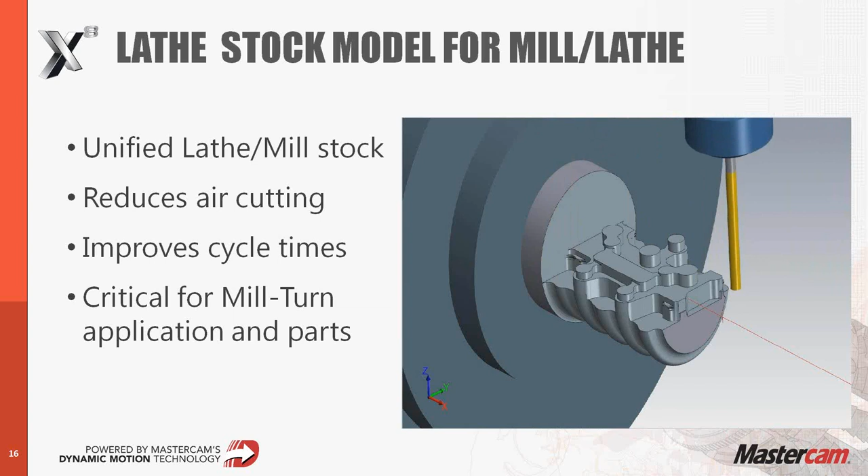Other enhancements would be our contour roughing. It's a new roughing strategy, as well as incremental depth cuts. I'm going to go into each one of those.

So for contour roughing, I'm going to go right to a file on this one. Give me one second to pull that up. Maybe I've got this basic profile over here. Instead of doing just a standard G71, G70 cycle where it's going from the face all the way back, face all the way back, I can now tell it to do a contour roughing. It's basically doing offset passes from my finished profile, complete offset passes, so a bit more optimal with a lot less wasted time going back and forth like a standard canned cycle would be. We can still trim that up to our stock profile to cut out some of the extra air cutting. So this area I need 4 or 5 passes, versus this top section I only need 1. Trim that back to the stock and you're all good to go.

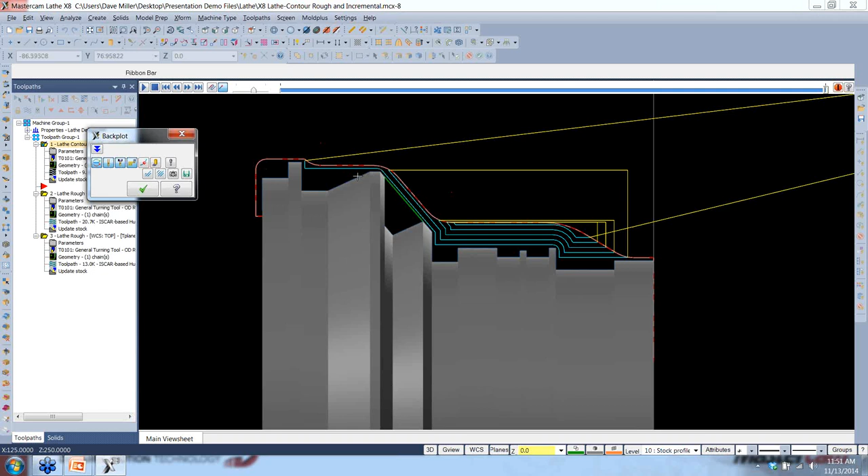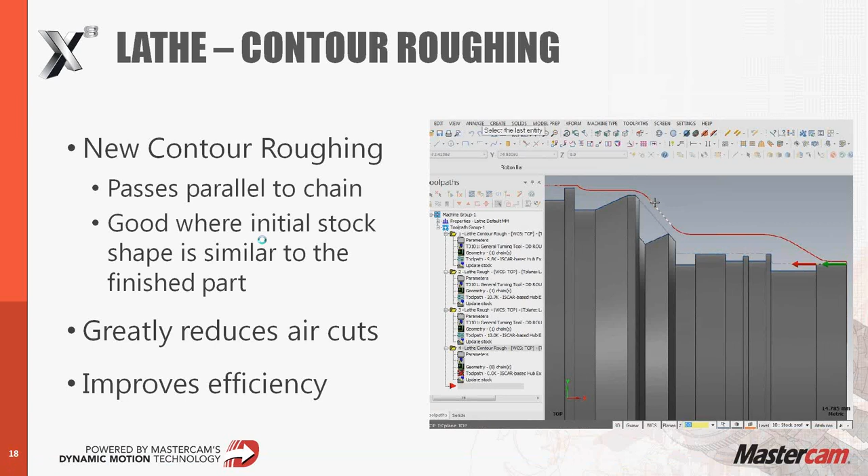Another new feature we added on the lathe side is incremental depth cuts. Everybody looks and says, well, what do we really need incremental depth cuts for? When you start taking bigger slugs of material that are really pushing the capacity of your machine—say I'm roughing out 303 or 304 stainless at a 5-inch diameter—the first pass, even though I know I could probably take a 100 thousandth depth of cut, is going to really peg that spindle load just because of the mass I'm also turning.

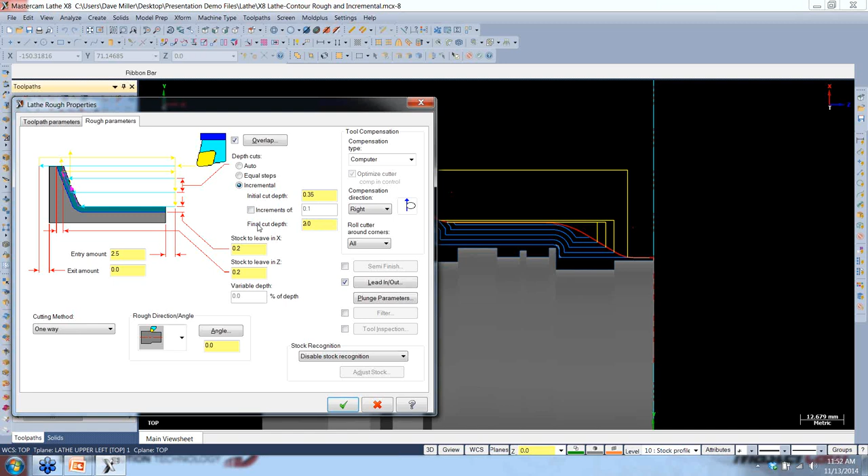So now, instead of just saying equal steps, I can say do an incremental depth cut and a final depth cut. First pass at 0.35 of a millimeter and last pass at 3 millimeters, and it's going to incrementally work its way down from that first pass to the last pass. As you can see, it starts at a nice tight toolpath and works to deeper and deeper tool passes each time, keeping an even spindle load on your machine and never over-engaging.

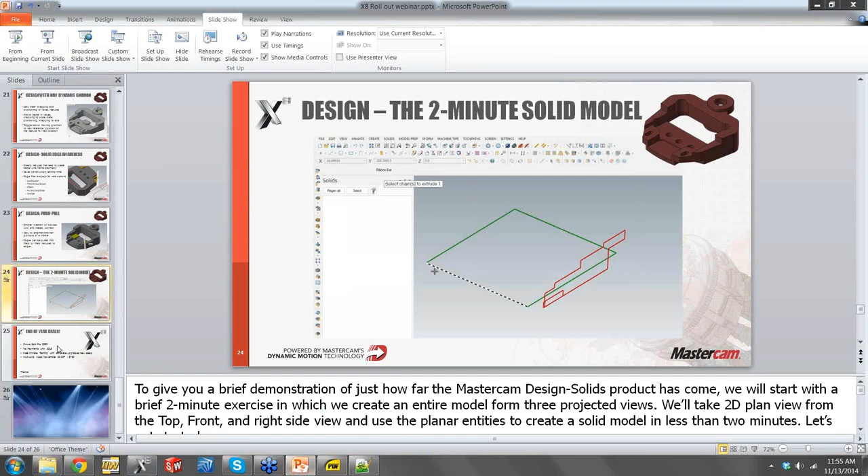That's kind of our one little tip of the day. And then the final items here. Let me just move my slide here.

A lot of people take advantage of CIMCO Edit Professional. What we call the OEM version is built into the Mastercam software, but a lot of people didn't know about this, and I don't think we made note of it as much as we could, but you can upgrade your CIMCO editor to the Pro version for $250.

And you can tie that to as many Mastercam seats as you have. So if you have 3 seats of Mastercam, you can get 3 seats of the Edit Pro at $250 a pop. Normally it's, I believe, $550 per seat for their professional version of the editor.

But I have a little PDF here of what you can get with the professional version and what's included with Mastercam. The big feature that a lot of the guys use is there's a G-code back plotter. So if you have a 3-axis mill file, maybe it was created way back in the day and you have no idea what it is, you can load it up in the CIMCO software and it'll actually show you the

toolpath motion. There's also some shop floor features in there, like you can rotate and mirror toolpaths right inside the CIMCO software without having to take it back to Mastercam and reprogram and repost it and things like that.

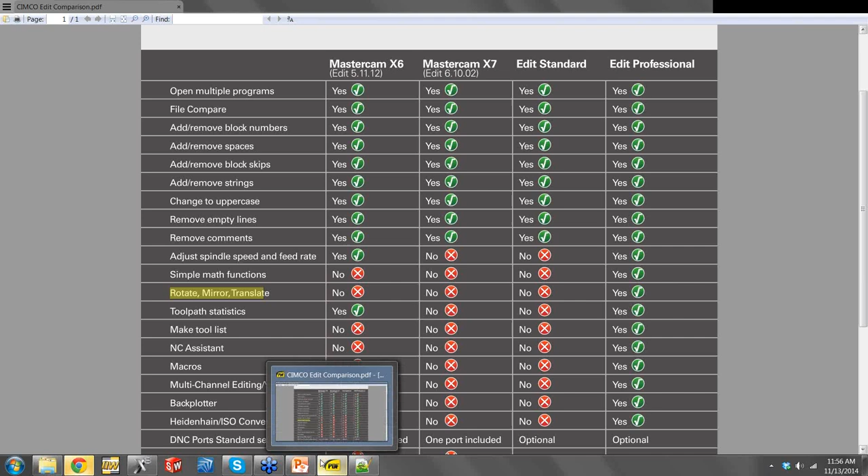But since we announced it at the in-person rollouts, we've been selling these like hotcakes, because guys have always wanted to get their hands on that professional version of the editor. And the maintenance on it is $45 a year, so it's a relatively cheap option to expand how you interface with Mastercam and the NC files in the shop.